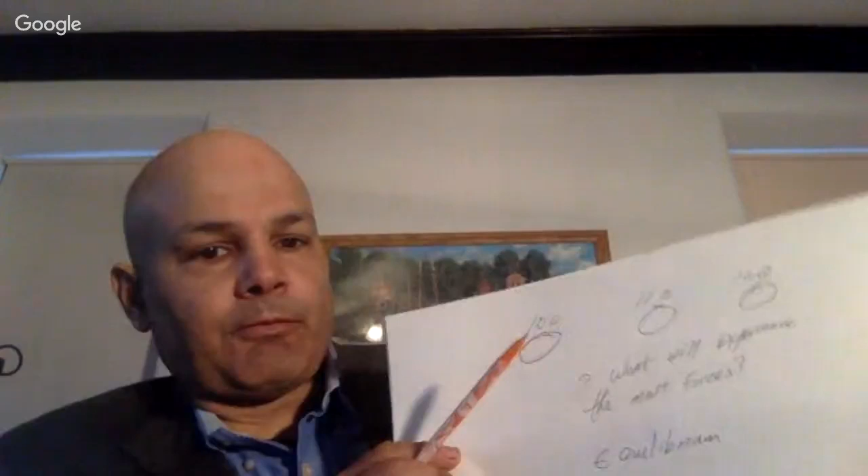Let me ask you guys something first. You can use rubber bands, or use whatever you need to visualize what I'm asking. If you had 3 rubber bands, or 3 post-tension cables, and one was at 100 - you can call it percent, pounds, kips, whatever, it doesn't matter - but understand it has different ratios. One at 100, one at 110, one at 120.

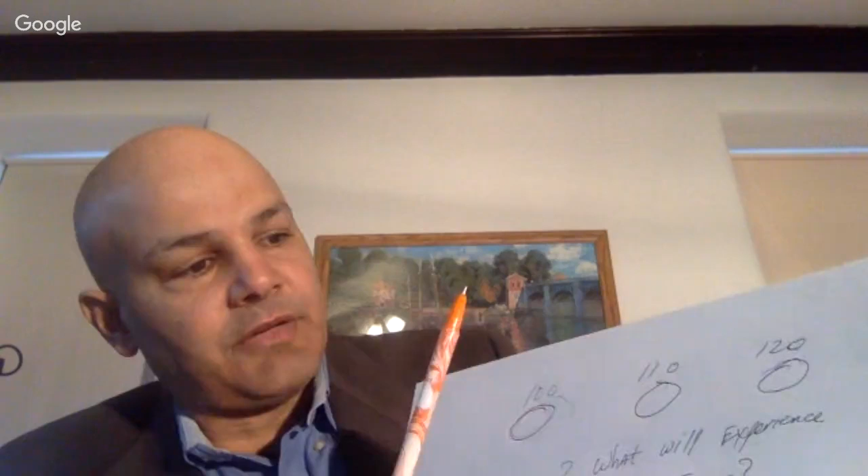Which one of these will fail first? They're all connected to the same load: 120, 110, and 100. What will experience the most forces? Think of equilibrium - are these in equilibrium? Well, they're not in equilibrium. Let's consider everything balanced, the rest of the load is balanced, if you will. So I don't have more weight over here. Everything's normal, all the weights are equal that each one has.

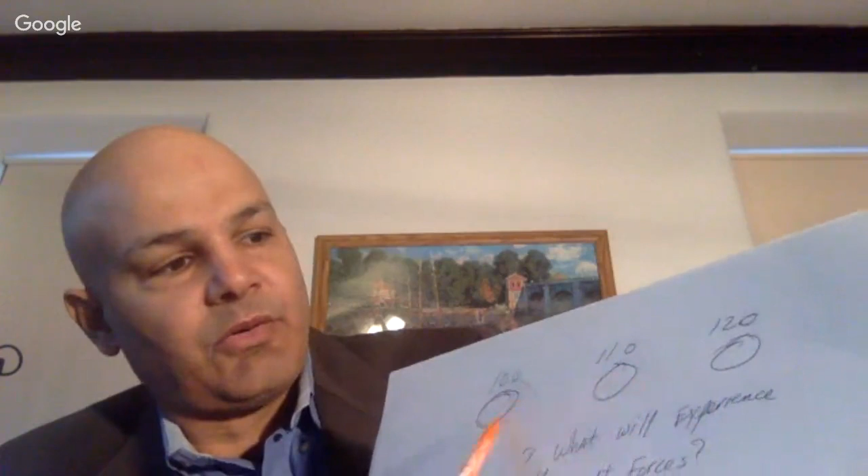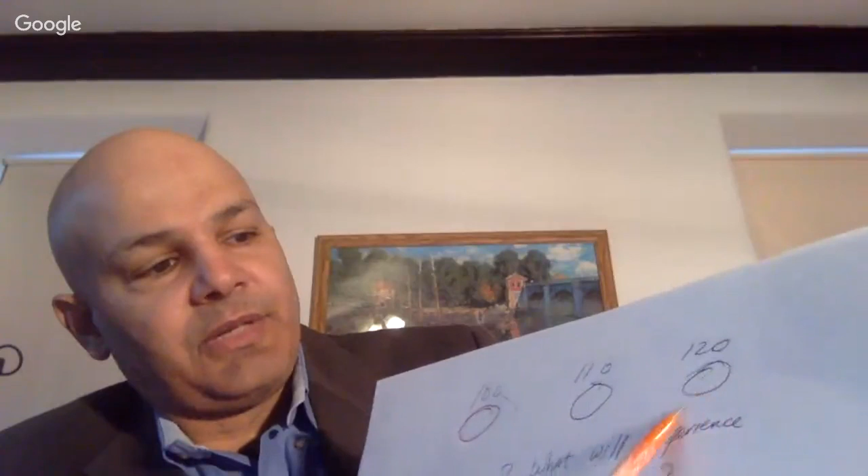Which one will fail first? Well, this one has more forces on it, the 120. So as you put load on the bridge, everything being equal, as the load is added to a structure or bridge, the 120 will experience the load first. It's pulling the most, then the 110, then the 100. So this will experience the issue first.

With that said, let's jump right into the video. Let's jump into the video. This is the clean pen - just trying to figure out how to, so I don't put things like that in my mouth.

Okay, sharing a screen. We're going there now, sharing screen. Just a moment, I think. Wow, that's taking a moment. Well, that's interesting, Google, thanks a lot. Entire screen - and it does not want to share my screen. Normally there's a button here, I just press share screen. Great, don't tell me I've got to bounce out of this whole video and start over again. Let me cancel that, let me try again. Share screen. Google really does need to get themselves together.

You know, they know how to spy on us and everything else, but their platform - they are bottom of the rung. Besides being able to put data out there as far as loading videos up, they have more issues. It's simple, all right let's try this. Let me try something around about and then try this. Share screen - I'm at the end of this video. It will not let me share my screen. I need to share my screen to show you what's going on.

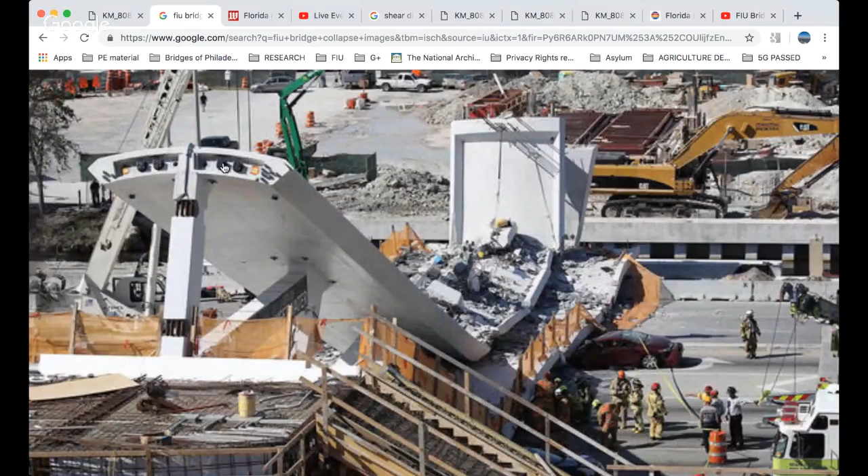How is that important? We go to Google, pull up the public images here, and we'll get to shear. I just want to show you here, we have all of the public images out here. We have 1, 2, 3, and 4 pockets open that need post tensioning in it. Also, they need to be grouted. Never forget, these needed to be grouted.

These were ungrouted longitudinal cables, ungrouted as far as I could find anywhere in my search. Now let's go back to the article, and then we'll jump to this. So this is the article over here.

Now, I mentioned how that's unsupported, right? So I've got these tabs lined up so we don't have to jump around too much besides me finding a tab. You will see that the temporary supports of the main span section shall stay in the middle of the cross section during SPMT transport. And there's a work text here. Looking at the text, give me a second.

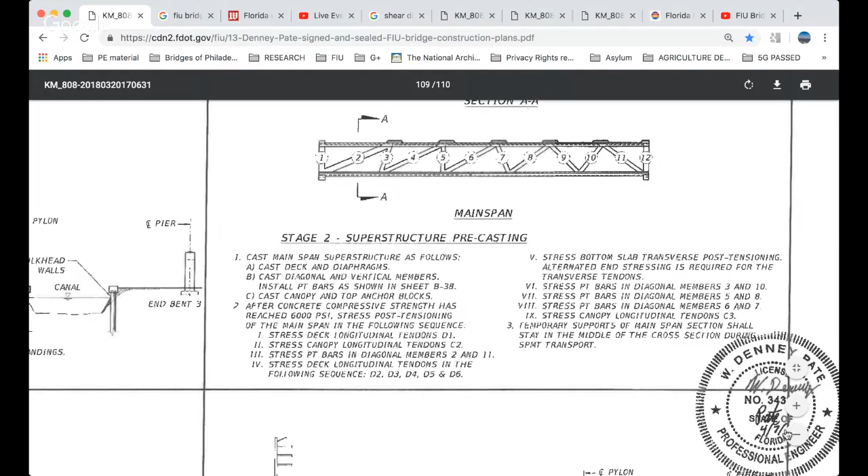Okay, so 'shall' is one of the things that is not optional. Shall and must, those are your non-optional words. This is a non-optional word. I've been trying to find an update to this plan, but this is 417. I have not found an amendment or addendum where the 'shall' has been removed from this, stating that they shall stay in the middle of the cross section during transportation.

That brings us to the one I just critiqued, which would be this one. Do you see the supports in there? No, you do not. I did a video stating that perhaps financially they didn't want to remove them, to close the road down to remove them. But if they were in place, that would have given more bracing to the structure to allow for its completion, as the design calls for.

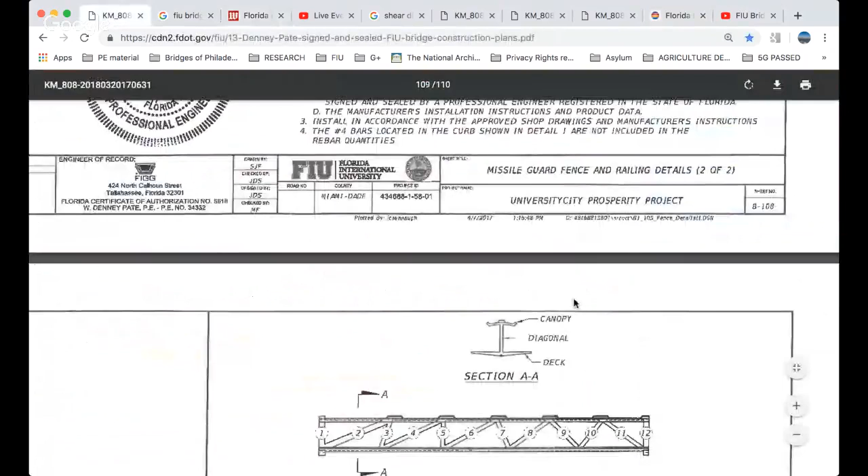So you can call out construction now as an issue, and that will bring us back to here, in the middle of the cross section during SPMT transport. It didn't remain in place. It doesn't actually say where it comes out yet, but we'll get back to that. We'll get to the tensioning, and let's jump over back to the article.

According to meeting documents, bridge designers pushed back, downplaying the concern.

The FDOT engineer also brought up the possibility of excess force shear. When the bridge fell, engineers say that the failure occurred in the same area cited by the FDOT engineer months before, and that the shear was the cause. I don't know what engineer they're talking about, maybe the engineers on that other channel, tips and tricks or whatever they call themselves, the ones with the sensitive amygdalas.

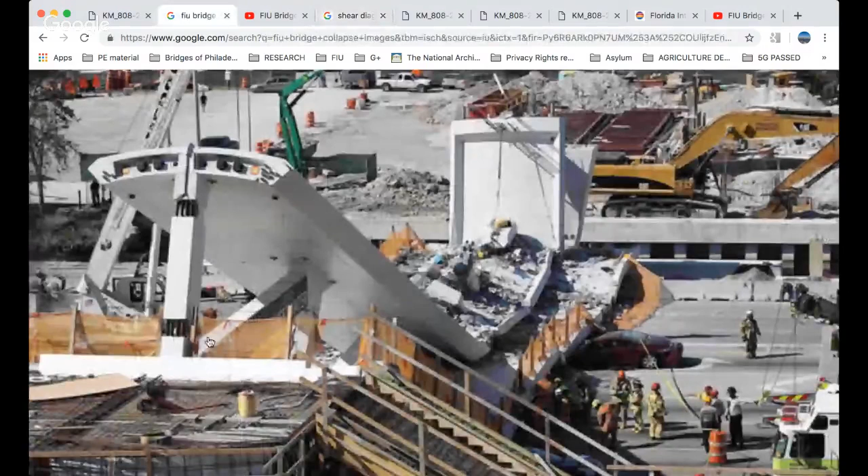And let's go to - well, I can trash that, no, that's the wrong one I'll be trashing. And the images, we'll get to that, we'll get to them real quickly. Shear is down to number 11.

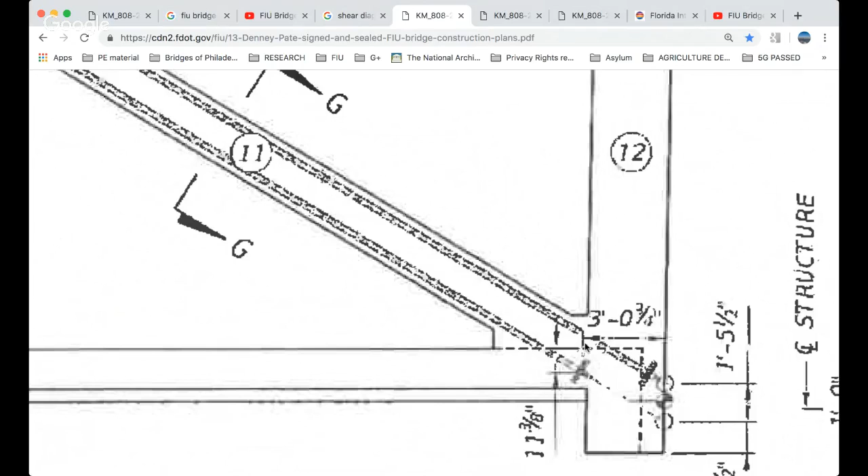You can look at the video 100 million times, and you do not see this pushing this off the base. In fact, you see this staying there. This does come down, this section here does come off, but it's not at a shearing point. A shearing point would be the failure here. We see in the video - and I'm waiting for my mouse to catch up.

We see in the video a failure here and a failure here. You can literally see the member still standing up. So you see a failure here and here. That's a dead load failure. It's just the way the structure is transferring its load out here, and it's resolving itself here and here on this canopy and also the deck. Sometimes I call it the umbrella for fun because it's shaped like one, you know, for rain. But there is nothing going on here. And then as this pushes down, this has no choice but to break free.

Shear would also require a force to create shear. And if the bridge was creating shear here, it would push it off, and that force would more likely be a buckling effect. The only shear that the other... what do they call them? Again, engineer tips and tricks, I call them, whatever they are. It would have to push this off. But doing so, you would see a lot of compression here too, and you would see some crumbling. But wait a minute, this cannot make itself longer. Remember this, you just can't push this off without all of this stuff moving over. And if it moves over, you would see shear here, breaking here, or somewhere else. You would see shear in all these other bridge members.

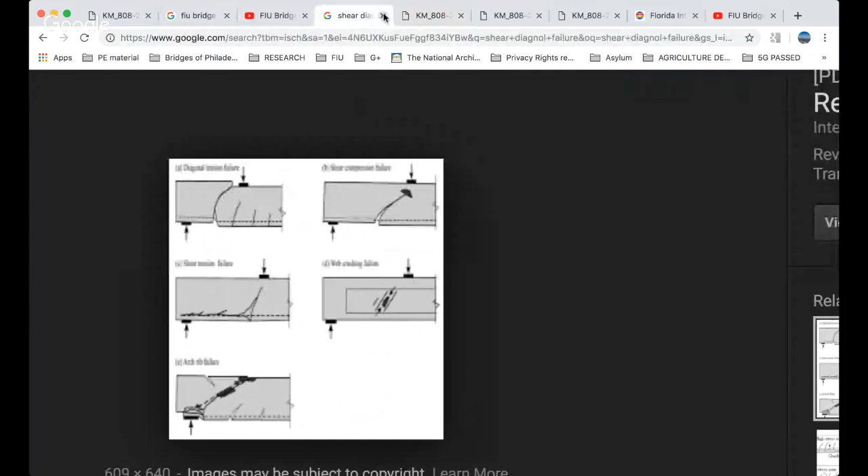As it pushes over, for some reason they have it magically going laterally. Laterally. Let's get rid of that shear. That one's done now. They have it magically going laterally, and it does not go laterally. It's holding up great. This didn't move. This suffered this. I've looked at these images. No shear here. There's no shear here. No shear there, here, or there. So these did not move. But magically, they have this moving over. And I don't know what's up with this shear thing.

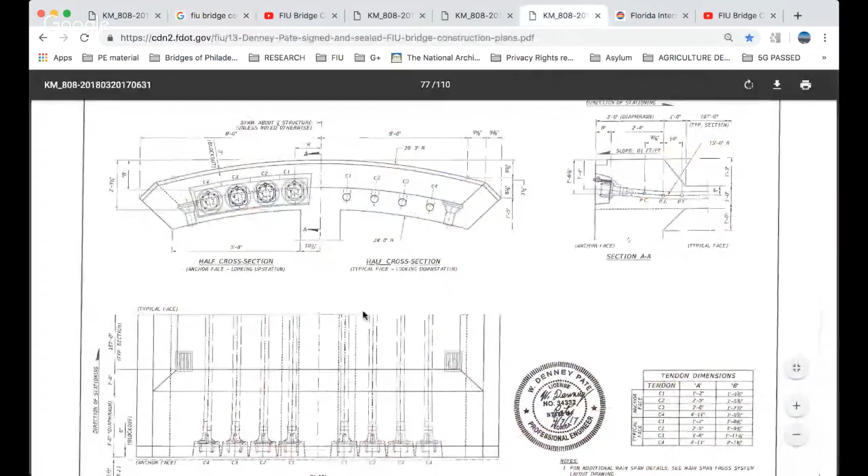I do know what's up with it. Once you make up your mind, you know my amygdala theory, it's very hard to change your mind. You need new data, but people's prides are involved. You can't change your data; it would be an attack on yourself to change your data. For example, me, you think I'm vested in my non-shear thing. I am vested in it. But if you can show me how shear took place, I will say wow, awesome, I did not see that, I just learned something new. It would be an attack on me, yes, because I'm vested in it. There's no shear that took place. But you'd have to show me a video. There's no way you're going to show me this in math.

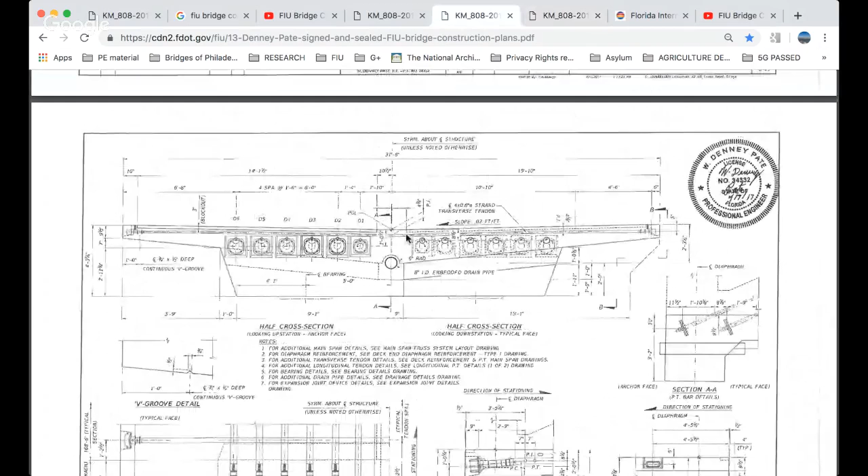I need to see the video. So going to this awesome detail, so we can come back to that statement here, and helping you guys out to get the rendering of this again. So here's number 11, here's number 12. This somehow magically pushed this off, but there's no video showing it being pushed off. If it pushed off, what did it do? It didn't come back, it didn't slide back up and put itself back in position, because we see in the failure of the bridge images, we see it sitting on a pedestal. Down here, we see it sitting up here, a pedestal, the pier. And we see all these members lying where they lie.

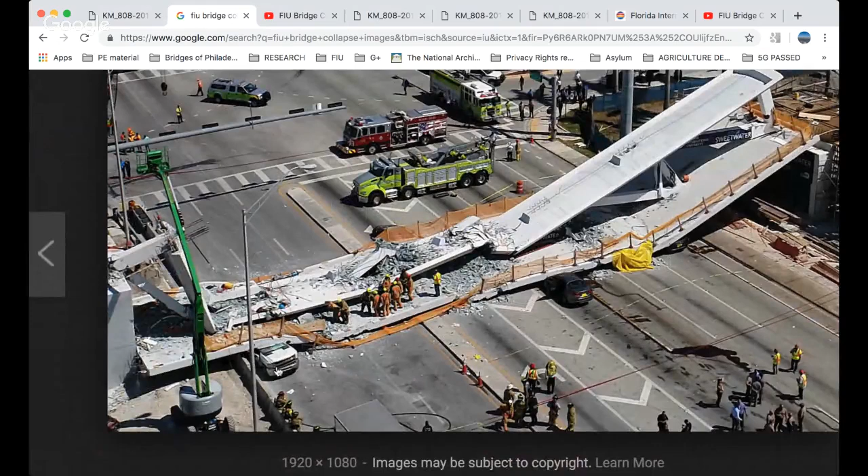If you look at the video, and I showed in another video, I thought it was a pretty nice video, I show where the racking took place as it pushed this over just a little bit, as it had no choice as this was being pushed down. Oh, you got to see that video, you got to ask me for the link and I'll just send it to you. That takes too long for me to run around there right now. But you can see that there is the member broken there and the member broken here. This is below number 10, and this is on the top side where it resolved itself in the canopy and in the deck. This is not broken. This has hit that part there, it hit the Jersey barrier. So the break is here and here.

The break is here at number 10, and right there. For shear to take place, they're implying that somehow magically the whole top canopy moved over, shearing this off, putting it back in place, sliding back over, and falling down to here.

It's just ridiculous. It's like me trying to tell you that this point here, this member was number 12, sheared this off right now. If we can visually try to make it happen, we have to make this stuff move. This doesn't just make itself longer. It's not a jack inside of it. In fact, they were compressing it at the time of the failure.

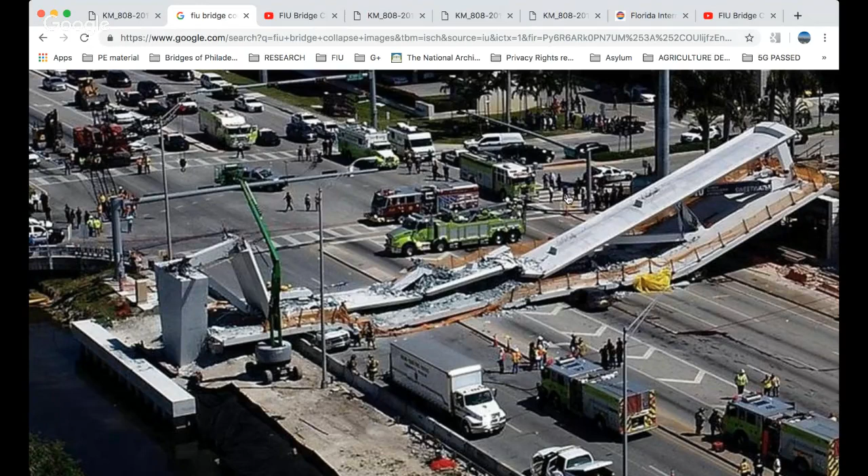So shear is my number one trigger that I find, is that they're counting on the ignorance of people not knowing, I guess, engineering, if you want to call it, or physics, or having a natural ability to use logic.

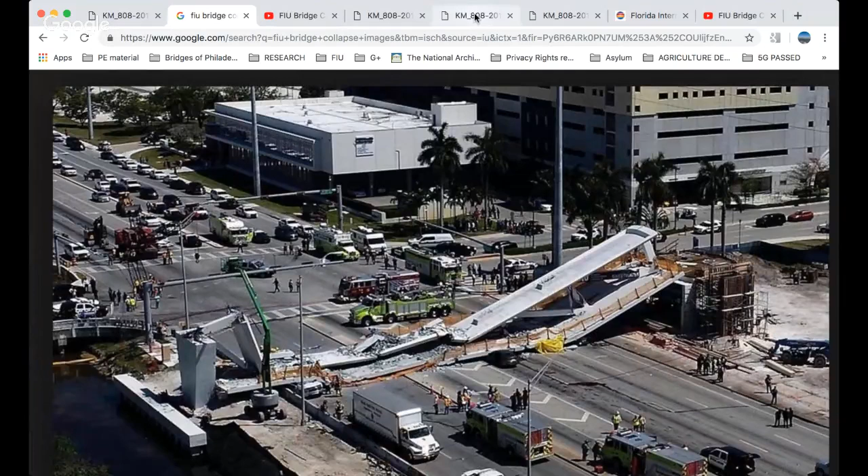All right, so just trying to bring it every which way. Here we go. So cast main superstructure as follows: cast deck. So they did a deck, and diaphragms. These are the diaphragms. The diaphragms would be this section here, as defined by themselves.

Cast diagonal and vertical members. That would be 1, 2, 3, all the way through 12. Install post-tension bars as shown in sheet B38. All right, so they're going to show B38.

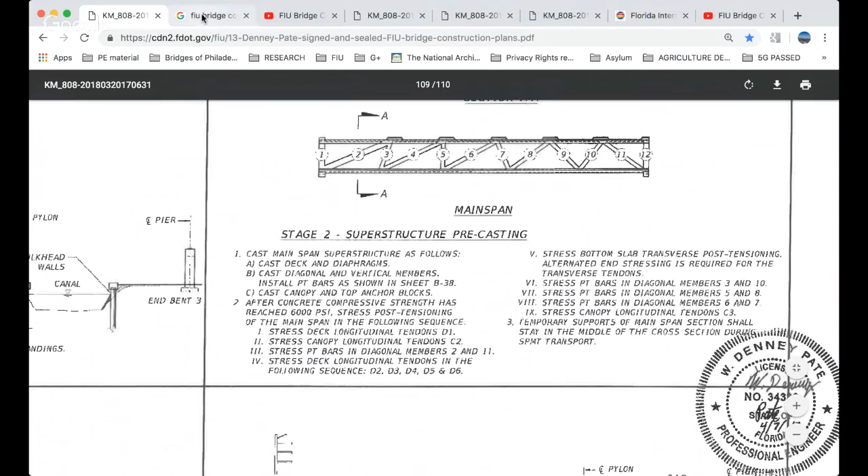I think I have a better one for B38 lined up. Here's B38. So these are the post-tension, the bars they're talking about.

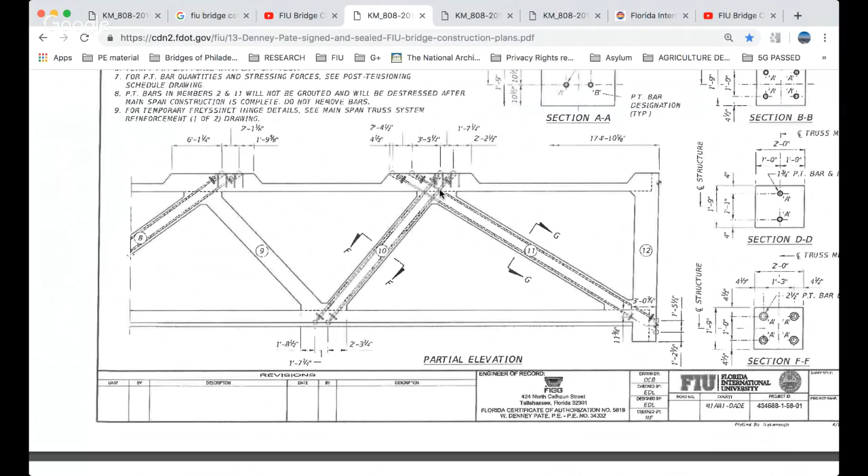There's number 11. At one point, I thought there were 2 of them. Finally got the disclosure and read the documents. It's 4 of them inside here. 1, 2, 3, 4. Wait a minute. Now I'm confused again. 4, 2, and 2. No, 2 here is 4 in some of these other guys. That's what it is. It's 2 in these guys, 4 in the other.

At one point I said these weren't balanced, in one of my other videos I reviewed. I think they are balanced, but not based on their length. One was only like 1 inch longer, I think, or something when I looked at them. Something like that, but that wasn't too crazy a concern for me.

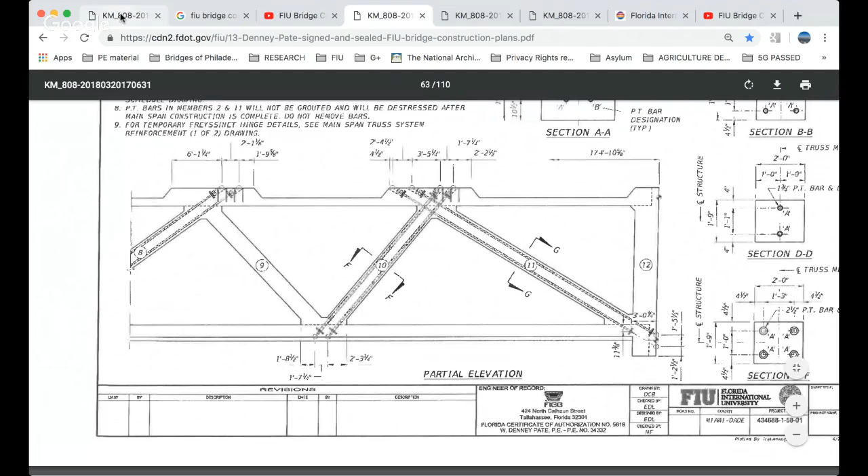After concrete compression strength has been reached, 6,000 PSI, stress post-tension members of the main span in the following sequence. This is considered the main span as defined by themselves. So you're going to stress the deck longitudinal tendons D1 and D1.

I think that's going to be my D1. Here's D1. When they say D1, they mean 2 D1s - the D1 here on this side and the D1 on this side. From that point, they're going to go to the top of the canopy.

Stress canopy longitudinal tendons C2. At that point, they're going to go to C2. So they did D1. C2 is the second one in here. So here's C2, and this is C2. So here's 1, 2, 3, 4 as you count from

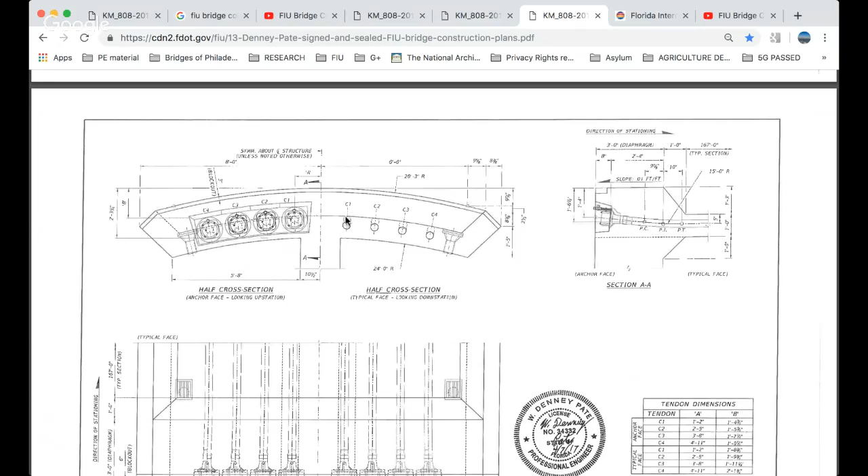interior to exterior. 1, 2, 3, 4. I'm thinking human body now - posterior, interior. I'm getting a few things confused in my own little brain.

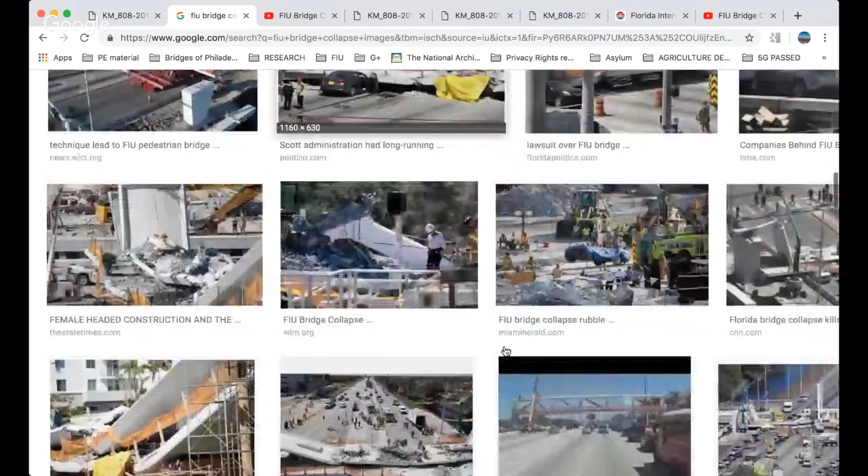So here's C2, and then we go to this guy. And zoom out - give me a second here. I guess I could go back a tab. Maybe that'll work. Oh, there we go.

So this is C1, C2, C3, C4. So this is C2, and this is C2. And they've been installed, and those are the caps for the post-tension members. Remember, no grouting is taking place though, as far as I could tell.

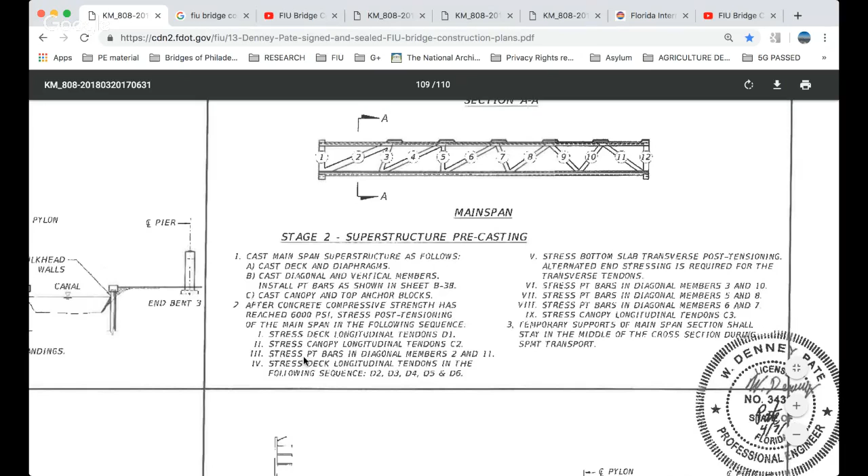From that, after you do D1 and C2, D1s and C2s, you go to stress post-tension bars in diagonals, number 2 and number 11. Very, very important here. But remember, this has got temporary bracing all in it also - there's bracing all in here.

This is the pre-tension, if you will, going on incidentally, not the final tension. So here's the bracing, all in this guy. Number 2 and 11 is next, though. So very, very critical that they went from only 2 post-tensioning cables in here, 2 in the bottom, 2 on the top, and they went right to 2 and 11. 2 and 11 - I find that interesting.

So they pull this taut and this one taut, and they work their way inbound, as I recall. So here's 2 and 11, the outside—not in the middle, the outside. So they tighten up 2 and 11. That's where you can look at it.

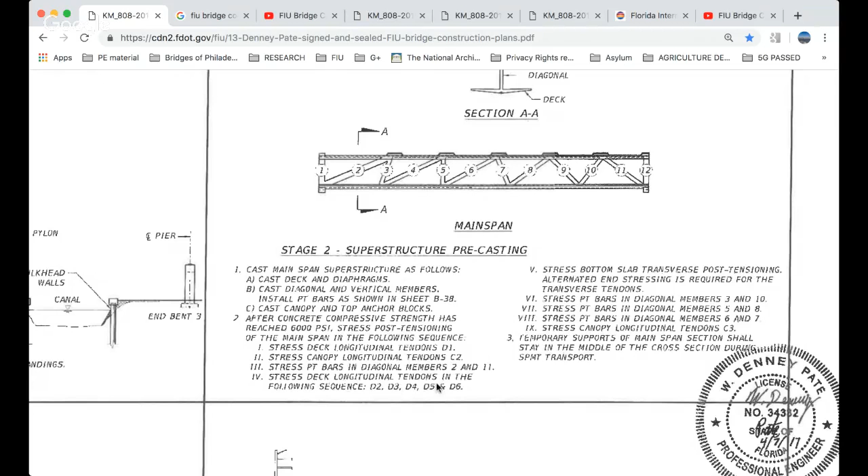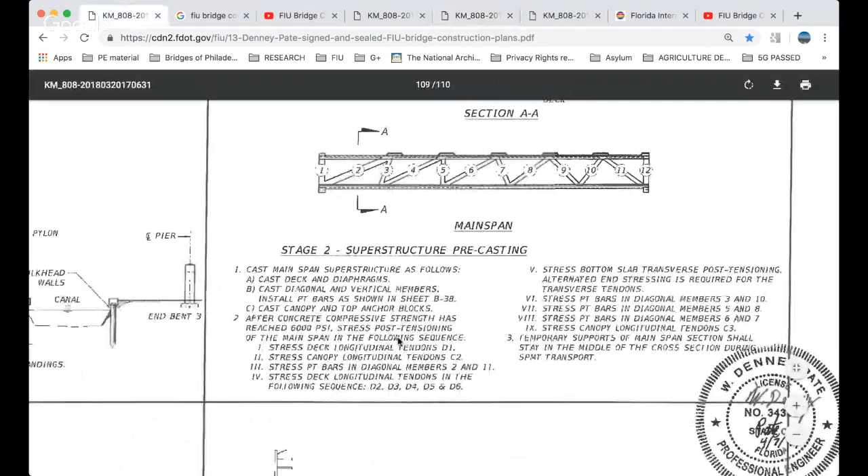Okay, so the deck was done next, completely knocked out, complete on the longitudinal cables, not the transverse. Stress bottom slab transverse post-tensioning, alternated end stressing is required for the transverse tendons. So they're going to do the transverse tendons just across this deck.

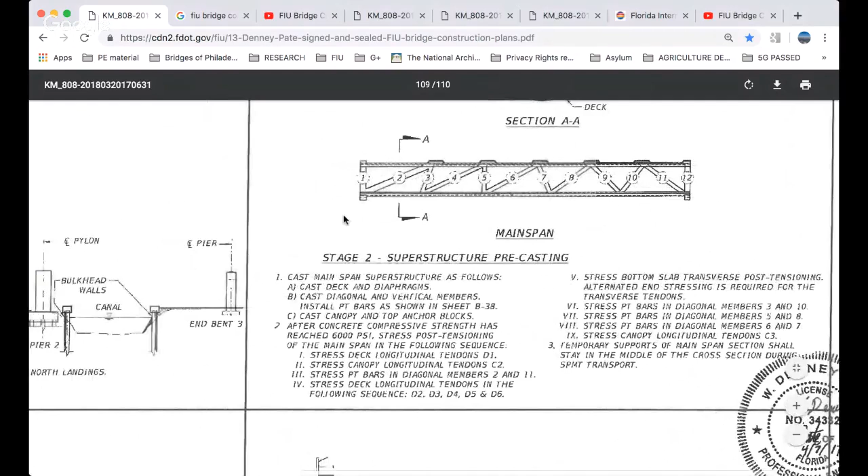I don't know if they're handy in the next one up. No, I don't want to go that far up because it's hard to find these plans. So let's come back to—great, looks like I went that far anyway. I bounced it. And I bounced it again. Awesome. Okay, here we go.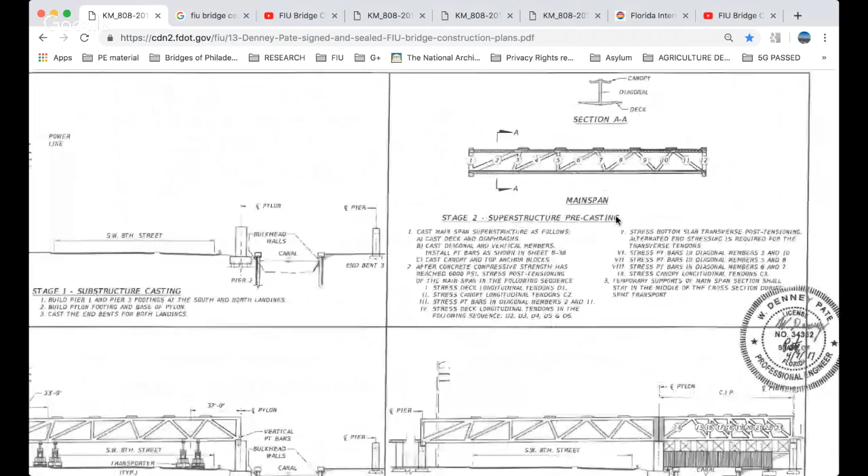All right, so the deck is totally done. Now, stress post tension bars in 3 and 10.

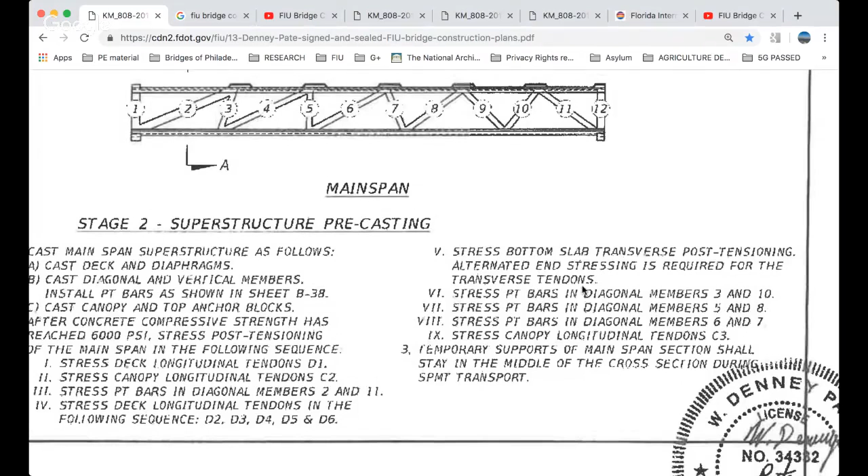So now you see working our way in. They did 2 and 11, now 3 and 10, and then stress post tension in bars number 5 and 8. They jump over 4—4 has no tensioning in it, I think no bars in it. 5 and 8, so 3 and 10. So they jumped over 9. 9 has nothing in it either.

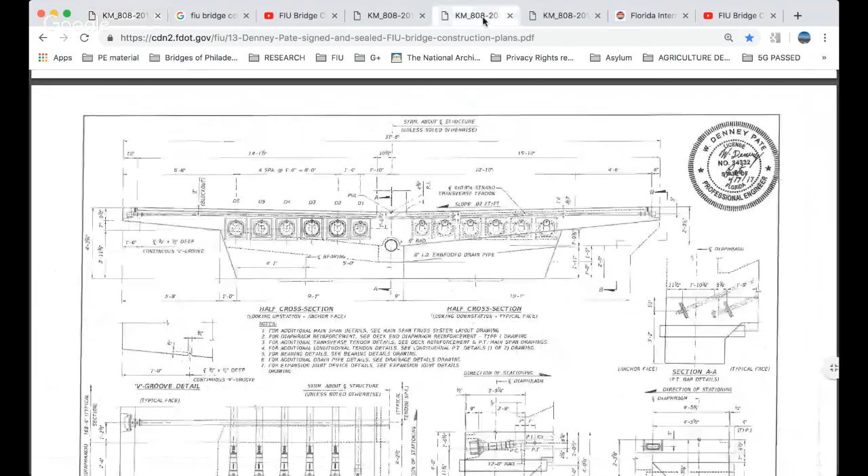Stress canopy longitudinal tendon, C3. So after they did all of that, they then jumped to C3. Up here, here's C3. Remember 2 and 3—3 is outbound, 3 is over here. Here's number 3, and that's number 3.

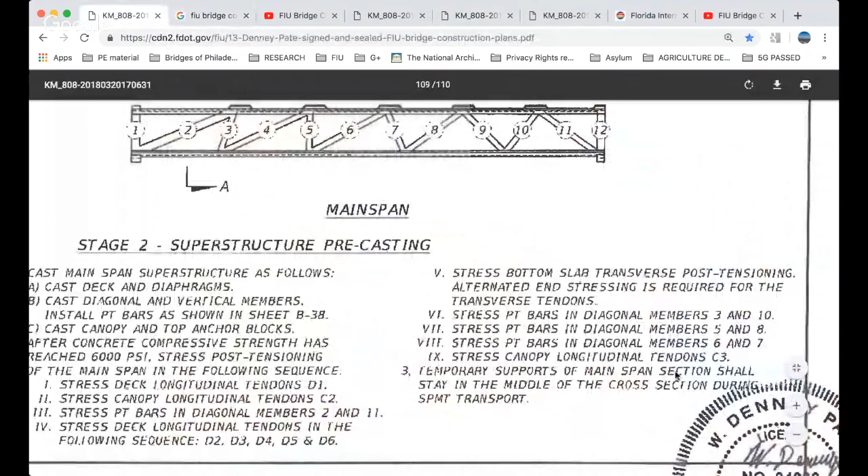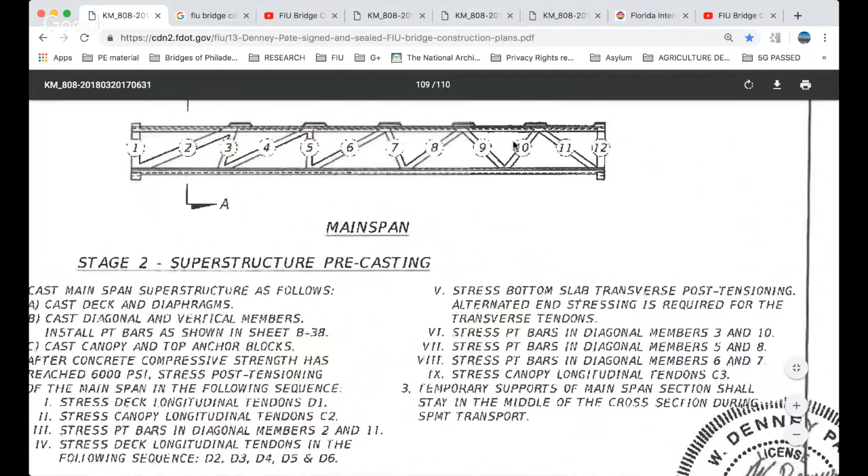Coming back to here: temporary, and then they're very important. That's it, they're done now. Don't do anything else—this is not finished. They still have more post tensioning that needs to go in this guy, right? And then number 2 and 11 will not be de-stressed until the main span is complete. And that is defined.

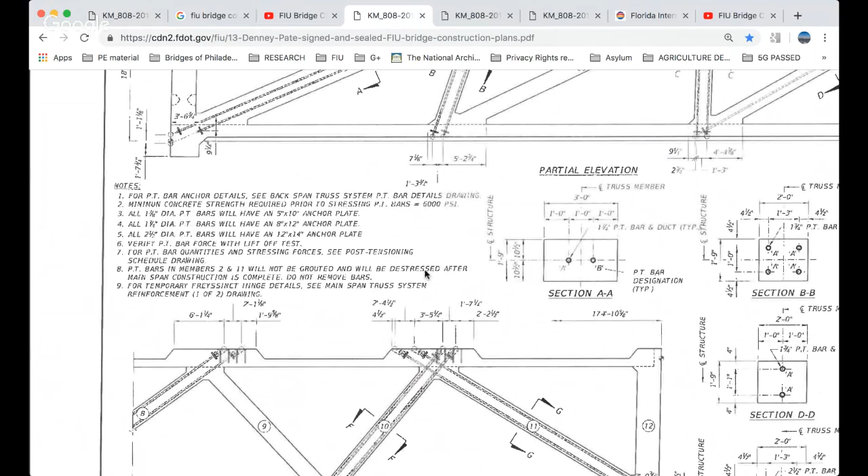Post-tension bars in members 2 and 11 will not be grouted and will be de-stressed after main span construction is complete. Do not remove bars. See, it was never supposed to be de-stressed—that's another construction issue then. If you can read the plans and somebody says, let's de-stress 2 and 11, you go, wait a minute, the plans state that we're not supposed to de-stress this.

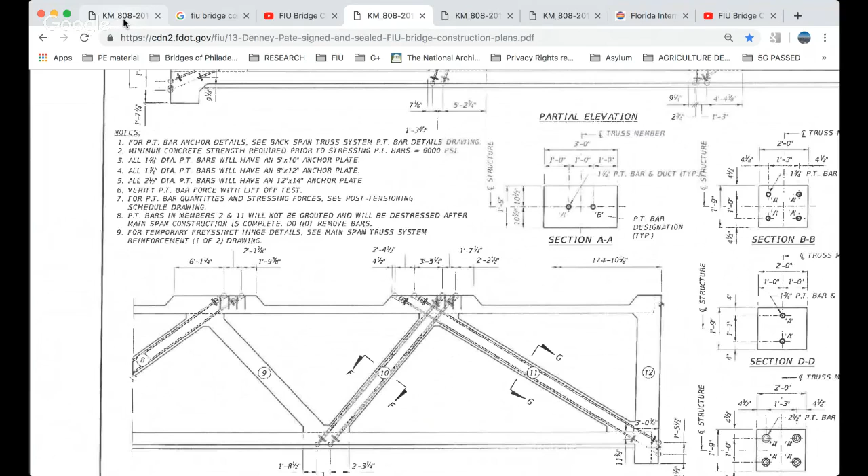If you remove the false works, the plan states not to remove the false works. So somewhere there should be a change in plan saying remove the false works, and another one should say de-tension, if for some reason they deviated from their own plans. Why? I'm thinking the engineering in them wanted to sample, wanted to see what this thing would do like. Or it could be something as simple as communication issues with those people speaking Spanish and being from Cuba—call it whatever you want to call it, bias. But this is a communication issue, or also just lack of skill.

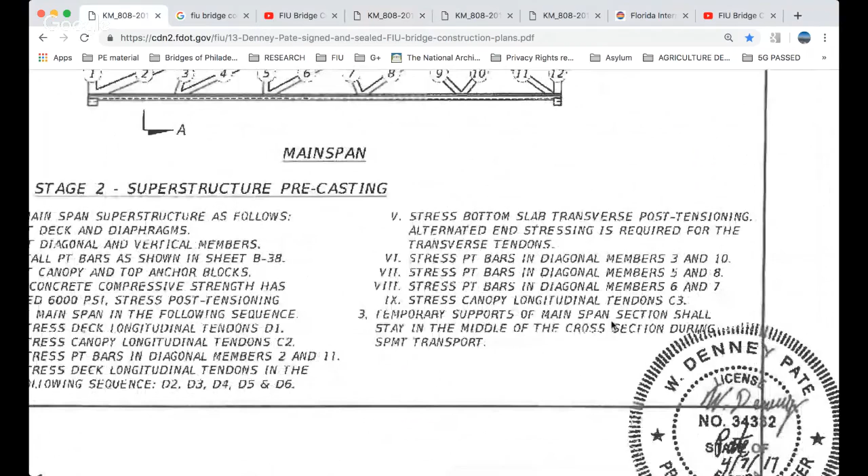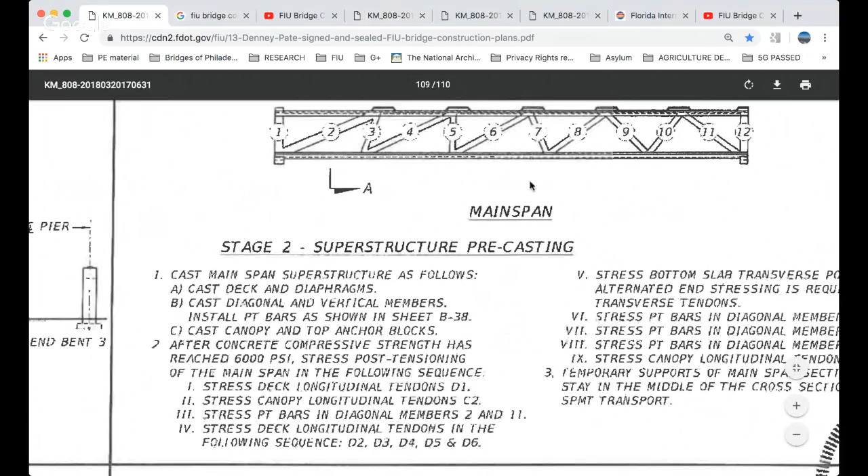Stress canopy—all right. Temporary supports of the main span section shall stay in the middle of the cross section during SPMT transportation. No one's called this out. NTSB has not called this out. They said the construction is all okay, right? Well, why is this not being called out? Why is 2 and 11 not being called out as being de-stressed? Because FIU is dialed in with the government, because NTSB doesn't care about the human being. They only care about government. Governments only care about government.

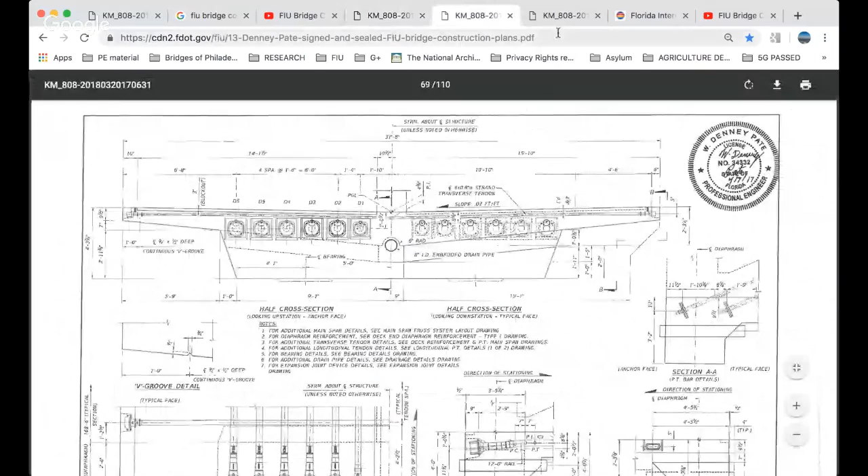That's the end of this video. We just went round in a circle because I saw that article pop up, and I'm countering their article with facts and data that's on here. I don't like using the word facts too much, but facts and data that are in this report. All right, so there's your 2 and 11.

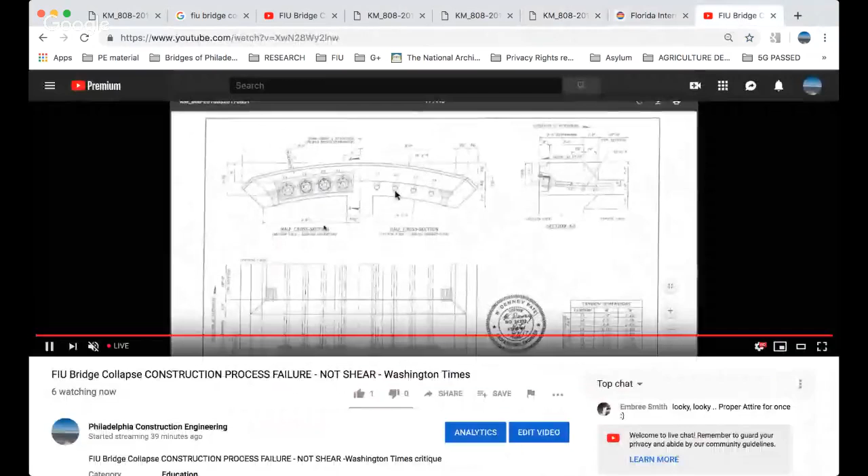So this thing wasn't finished. The post-tensioning was not complete, so it was structurally not strong enough. The canopy was not as strong as it could be to help in supporting the entire bridge structure.

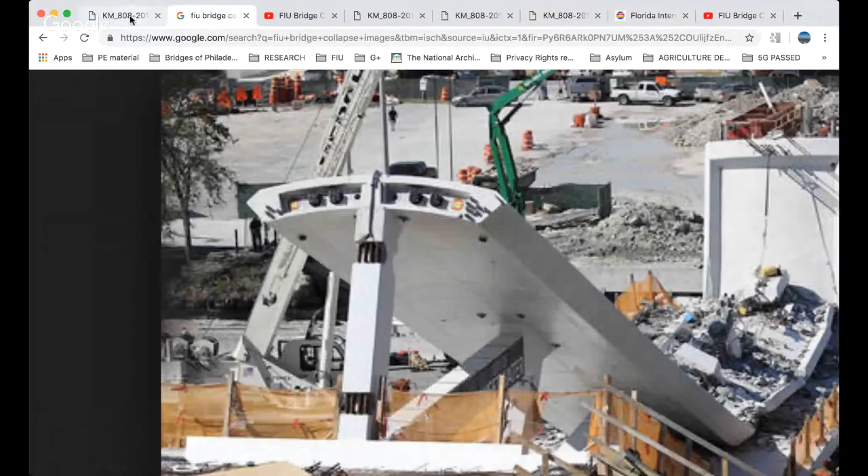Also, the temporary supports were supposed to be in there, and the cracking is number one. When you observe that cracking, all bets are off. I mean, you just use some simple—I don't know what their issue is. Besides, that's just craziness. That's why, again, the key is Denney Pate.

Denney Pate—give the guy immunity. Let him get sued however they sue, or give him immunity as far as you want regarding prosecution of criminal charges, locking him up. But trash his license and everything else. But give him immunity and say, give.

Uh-oh, looks like I quit this video just in time.

Yeah, I get a little excited on a job site. So,

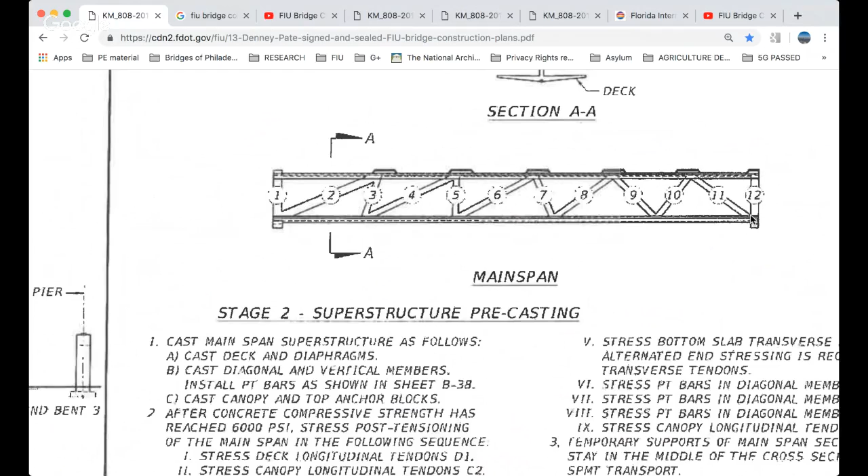Right there, 11. It's not shearing. Whatever NTSB says, I can't wait to see the report. If they stick with shearing, you already know my video's going to be similar to this, but it would just explain why. It might be a video saying why the NTSB should never be trusted. Of course, we already know they should never be trusted. Never trust your government. The government's just our owners. Call it what you want - paranoia, whatever.

I can prove it. I'm going to do a video next on fingerprints. Do we have fingerprints so governments can track us? No, we don't have fingerprints for that. Also related to that, fingernails. And before you get too excited, why do we have fingernails? Before you start telling me it's for climbing trees, well then why do we have toenails? Why do fingernails and toenails grow at a different rate? I'll tell you my answer in a video coming up about fingerprints.

Fingerprints is what we call them, right? And that's what I'm referring to them as. But it's the texture on the end, in our palms, in the bottom surface of our hands, from the wrist forward. I'll explain why - it's beautiful, it's simple. And the same thing will apply for the foot. That's my little teaser for my next video.

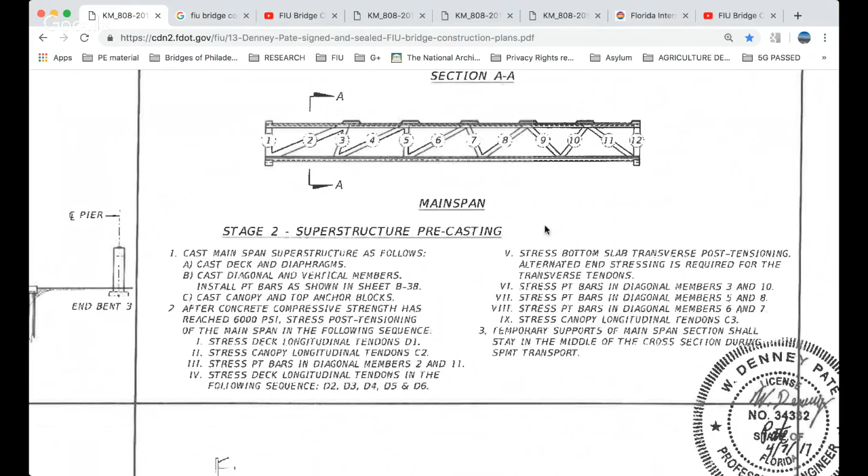And I'm also going to be offering $1,000, and you can change the price. If you tell me you want $3,000, let's negotiate. If you want $10,000, we'll negotiate on that too. But I'm offering $1,000 for anybody that can prove gravity.

And the teaser that I will be using is BBC's ball, feather, and bowling ball video. They use it to prove gravity, they say, and I will actually be using their video to disprove gravity. It's going to be a fast video, but I'm offering $1,000, or negotiable up to $10,000. If you can prove it, maybe I can make some money off it, maybe I'll own the rights to it - you can take it up. But if you can prove gravity without owning the rights, I'll give you $1,000. If you think your proof is worth more than $1,000, write me. But I'm going to use their video while they're using it to prove gravity.

And incidentally, my man was in another video I had. NASA is doing gravity research. They make it clear that you can't prove gravity, so don't get too crazy about it. NASA does post about gravity, but then if you find their gravity studies, they're trying to prove it because they say it can't be proven. So you're going to lose that one. Equilibrium, baby - it's all about equilibrium. Everything's equilibrium, it's not gravity. Gravity is just ridiculous. But I don't know how the tides happen - that's driving me crazy. And of course NASA will tell you it's the gravity from the moon. Yet they have documents saying they can't prove gravity. So there is no gravity from the moon. All right, $1,000.

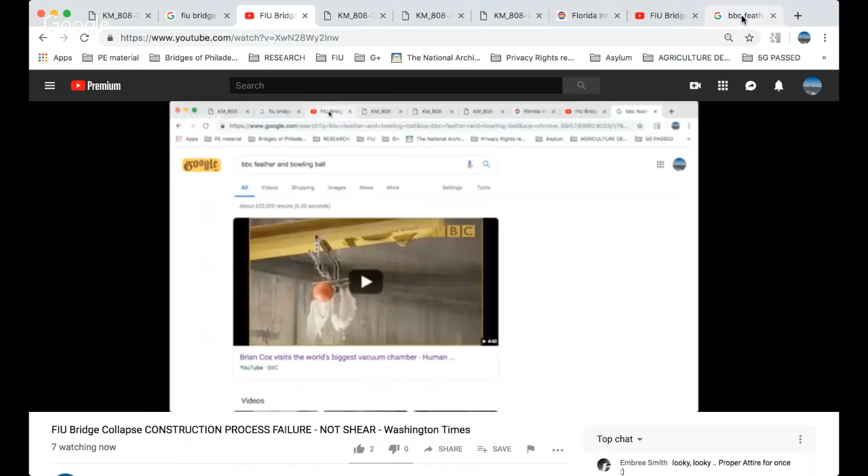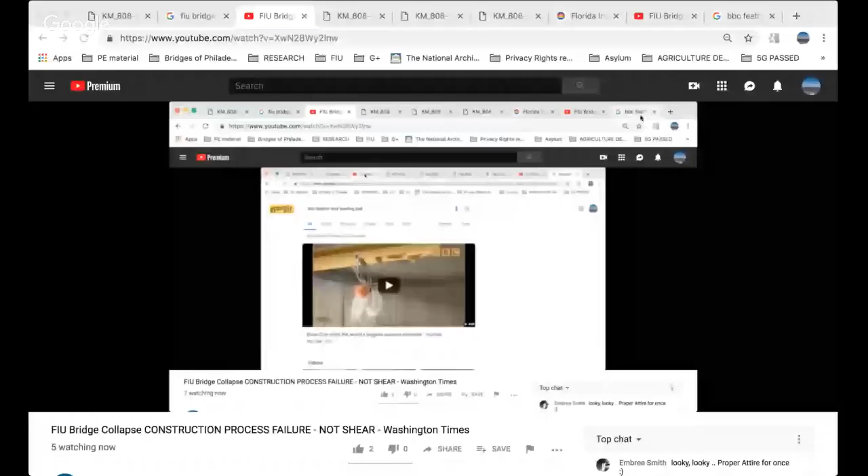And I don't know how to end the video. How do I end the video? We'll go here. This is terrible. They seem to like hiding it. All right, I'll be there in like 30 seconds. Well, I guess you guys get to watch me try to end the video forever. Come on. I know what I'm looking for - it's damn Google Hangouts, there it is. You guys know what happened there - it was these desktops, it was the second desktop, and then it was hidden behind the second desktop. So stopping the video, take care. Oh, I guess I'm saying hello first, or goodbye, Embree.